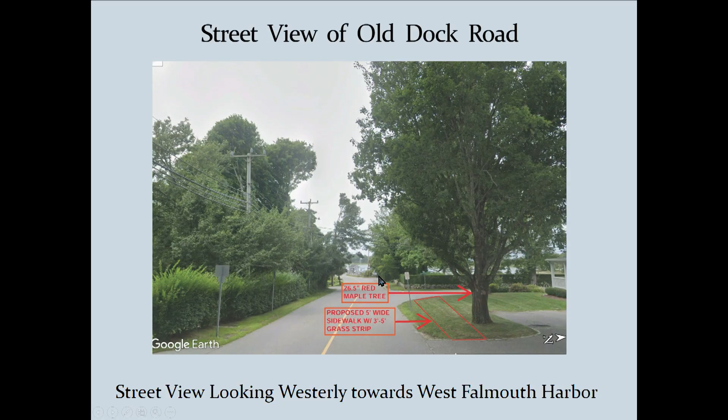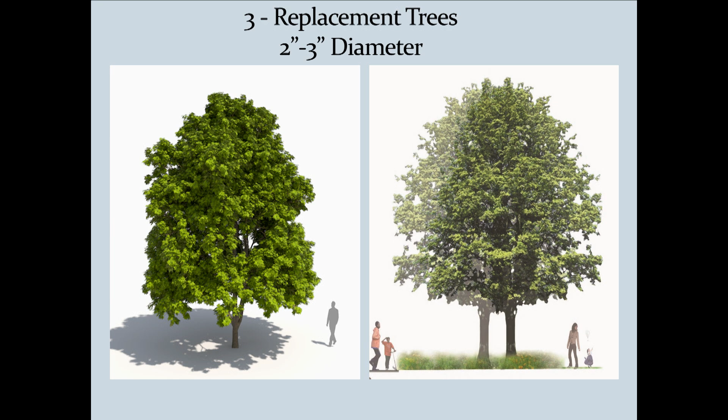So by the removal of that tree, we're looking at putting in 3 replacement trees, 2 to 3 inch diameter. I'll let Jeremiah speak to the species, but in that area we'd be able to put 2 replacement trees, and then we'd be looking at another tree somewhere along Old Dock Road in that area.

And once again, this just goes back to that plan with the project history. The sidewalk was supposed to be installed in 2009, 15 years ago, and it wasn't. It was not installed, so we want to complete it now and have it finished up.

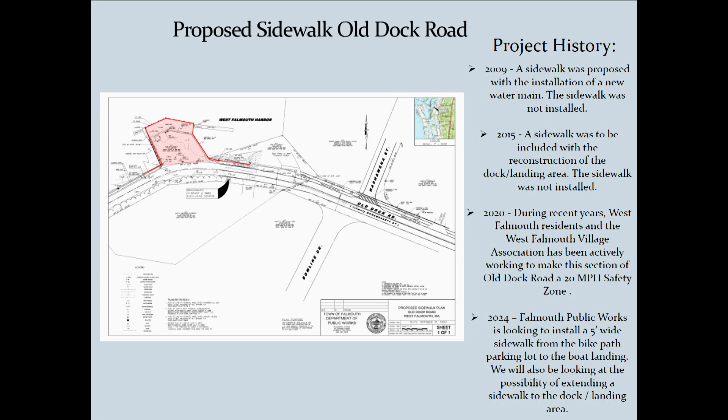Would you like Jeremiah to speak next? Jeremiah, do you want to speak? Well, then we can question them, I just have a question about a property line issue. You have a question? Yeah, but let's let them finish their presentation.

Mr. McConaty, you mentioned twice that the sidewalk was approved but not installed. Your slide shows that you're going to have the possibility of installing it. Isn't it more definitive than that?

No, we're going to install the sidewalk from the bike path parking lot past this first residence up to Nashawena Street, and continue it up to the boat ramp. That's the project. What we're looking at doing is continuing, we'd have to shift the road, but continuing that sidewalk in this area over here to get it over to the ramp. This section right here, this little 75-foot, 100-foot section, is the area that we'd be looking at shifting the road to fit that sidewalk in, to make it a complete project. So it'd be contiguous, from the path over to the boat ramp. Thank you.

So I don't have much to present, but I did set out an opinion that we did for the select board as well. The opinion from myself as the tree warden is that construction of this sidewalk is going right into what we call the critical root zone of that tree. That's where a lot of the storage and anchorage roots are. They're roots over 2 inches, so removing those roots is completely detrimental to the tree's health and structural capabilities. So if this sidewalk goes where it is, the tree will need to come down. There is no real saving the tree if we put the sidewalk there.

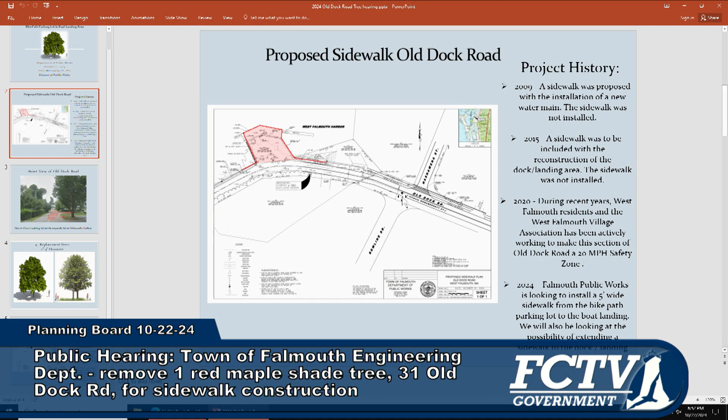The roadway layout for Old Dock Road is 50 feet - it's hard to see, but the property line is about a foot behind that tree. The pavement there is on the driveway, and the driveway's on private property. It's that grass strip between the L shape and the driveway and the tree - the property line's in that area.

So there's gonna be 5 feet of paved sidewalk? It will be five, for ADA regulations it has to be 5-foot wide. Because I'm also thinking of people dragging kayaks down there, giving them enough room. What we've tried to do, where there's room, is put in wider sidewalks - 6 feet and wider when we can. It makes it more like a shared use path, but in this area I think 5 feet would be tight.

Yeah, okay, thanks. Other board comments? Any comments from the public?

Dan Shearer, I live on 4 Old Dock Road. And this is a gorgeous tree, and I would love to save it if it could be. I've talked about it, and I really don't think it can be saved and have the sidewalk, which is very important - as they say, for baby carriages, and me and my 4-wheel little cart going down there.

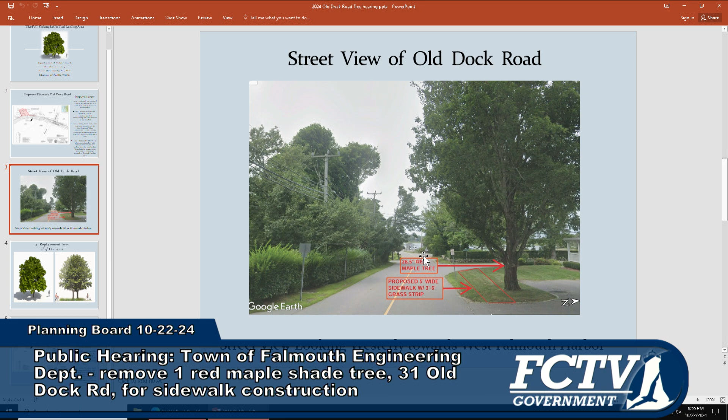I'm saying to Dan right now that for Public Works, this is the third time we've been looking at this. I want to get it done. But I think the process for this is kind of interesting. Mr. Cornock, would you explain the process?

Right, so it's because of the scenic road bylaw that the town adopted some years ago. Old Dock Road is considered a scenic road, and anytime there's work involved in a scenic road layout that requires the removal of shade trees or stone walls, the planning board is required to have a public hearing, take comments from the public, and create a decision or determination, and submit that to the town clerk's office. So it's a process the planning board's involved in only because it's a scenic road.

But isn't there another step beyond the planning board? Are you referring to the select board's process? Yes, and the select board also holds a public hearing, which they already have, and they've issued a positive decision to remove the tree based on a positive decision from this board. So I think everyone's somewhat in agreement at this point, although I can't speak for you at this time. And might be champions for the funding in one year, maybe. Perhaps, yeah.

Mr. Shearer? Let's not put it off. It's been put off three times. Someone who walks there every day, if you dump all these people off where it's now going to go, somebody's going to get hurt.

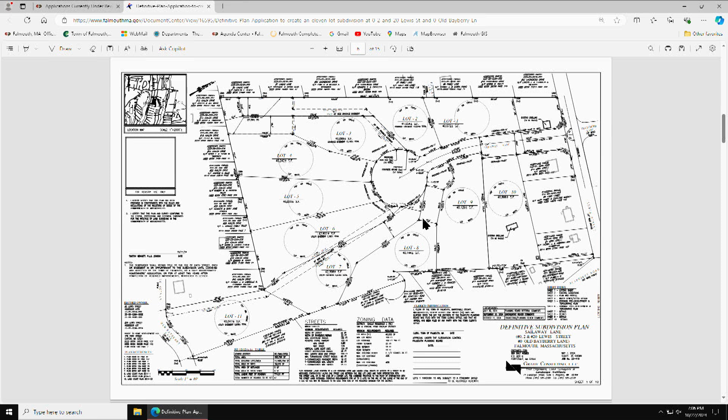I'm trying to remember if you officially closed the hearing at your last meeting. I think we left it open because there were things that were going to come in. That's right, they did come in. So I think our first step would be to close the hearing and then read the motion and see how it goes.

I move to close. Second? All in favor? Aye. Aye. Now the hearing is closed.

One thing we're just remembering is it's important to take any public comments on the new submitted plans that we received tonight, so you may want to see if anyone's here to provide any public comment. If there are none, then you're not in violation of closing that hearing. Is there anyone here who wants to speak on this particular plan? Didn't think so. No, I think they're waiting for their own plans. Very good, so you're good to go.

Okay, the same motion again? Move to close. Oh, we already did, though. Well, he said we had to hold up, I thought. No, you've already closed, it's fine, it's done. So Bob, do you want to read it?

Draft, October 21st, 2024. Motion that the planning board votes to approve the application of House to Home Development LLC, applicant, under Article 4, definitive plans, Chapter 305 subdivision regulations of the town of Falmouth, a definitive subdivision plan entitled Definitive Subdivision Plan, Sailaway Lane.

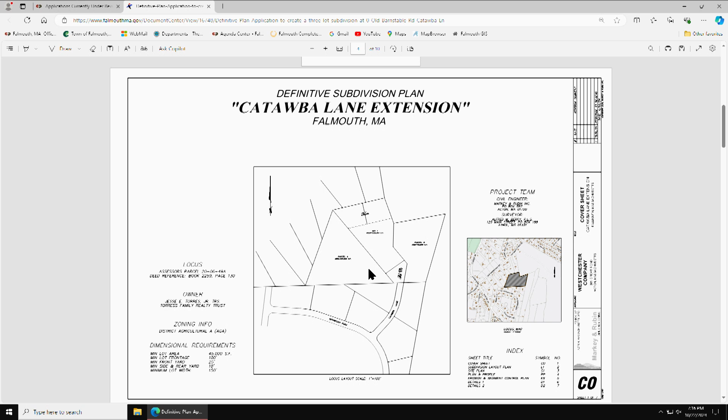Just doing the stub, we put all the language on there with regard to all the other lots not being buildable. There was an issue last time with regard to me not wanting to work with the 300 committee. I'm working with the 300 committee now, I've CC'd everybody, including the neighbors. I think we're in somewhat of a consensus on us being able to use the road, providing I work with the 300 committee, keep everything in conservation.

So there's an agreement that it will go into conservation? It's not that it's going to go to conservation, it just will be unbuildable, and the 300 committee will hold the conservation restriction. We'll still own the property, but they'll basically be the custodians of it, with the exception of the one house lot. And I think that was the big bone of contention last time I was here.

Okay, so I think you may want to validate that before I go further. They already did, they're shaking their heads. Oh, okay, I'm still going to want to talk.

About the roundabout, will that be redone? No, they're just going to leave it out. So did you want to address the other comments that are still in red?

It looks as if all the yellow comments are going to the engineer. The ones that are in red, I think, are really the ones that are going to deal with the stormwater management issues.

And they are addressed, I mean, I know that they said everything that's an issue here, that's in red, is in this report, which we have to go for a stormwater management permit in addition to. Right, so I think that's what we're saying, we don't want to put the cart before the horse, it's kind of redundant, so they're going to do it anyway.

So as far as I'm concerned, I think we've provided everything in the stormwater management report that's in the red. We can go through it if you'd like. I think that the planning department is satisfied by it, and the stormwater people, we'll hear from them at a different point. Did you wish to speak? I'm finished. He is finished.

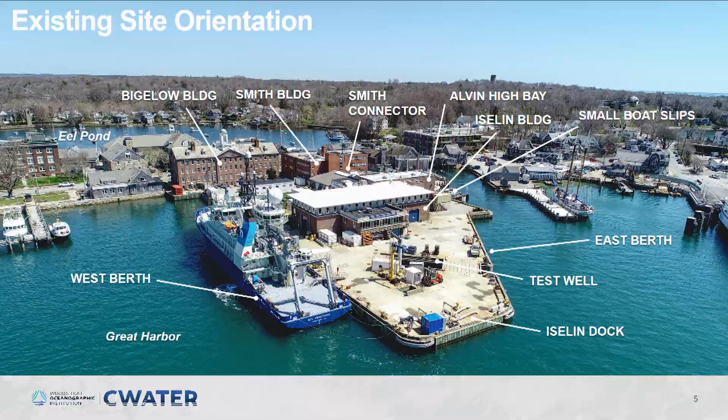So what's the reason we're doing this project? Just as a reminder, it's an old facility, past its engineering life. It's deteriorating, costs us a lot of money to maintain now, and that number is increasing. We also have operational limitations. It was built in the late 60s, and its height is inappropriate for the future relative to sea level rise and other climate impacts, so we have that threat existing. It's suboptimal to how we operate now, and certainly for what we think the future of oceanography will be. So there's an opportunity when we redevelop the waterfront to have a future-looking facility.

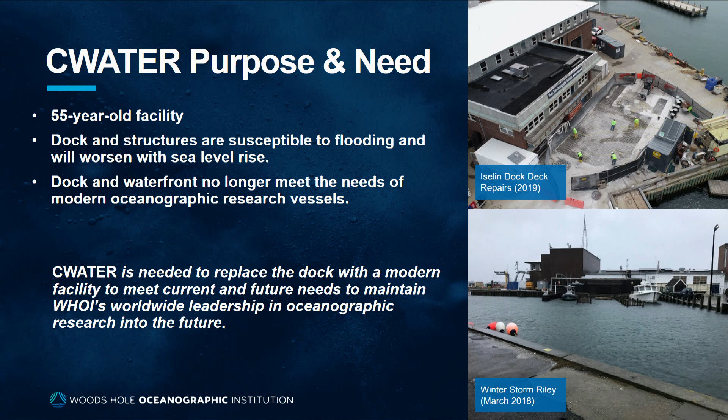So why are we making this change? The fundamental difference between what we proposed before and what we're proposing now is the order of the project. Originally we were going to do a building first, then build a new dock—taking down buildings, putting in a new building, and then building the dock. Now we're going to do that in reverse. The reason is that the urgent requirement is the dock. The dock is deteriorating and costing us more each year to operate, so we've prioritized the dock. This is a large enough project that we have to consider doing it in phases, fundamentally because of the cost. So we see this as being phased, allowing us to find the money to do the project in the right order of what's most urgent.

It also allows us to take a more holistic approach to this particular site. Previously we weren't even thinking about Smith, and now we are. But this is a longer-term horizon, so we're going to tell you the story of our plan, which has several years to it—hence the phasing, and the idea that we're telling you the end game, but there'll be several steps to get there.

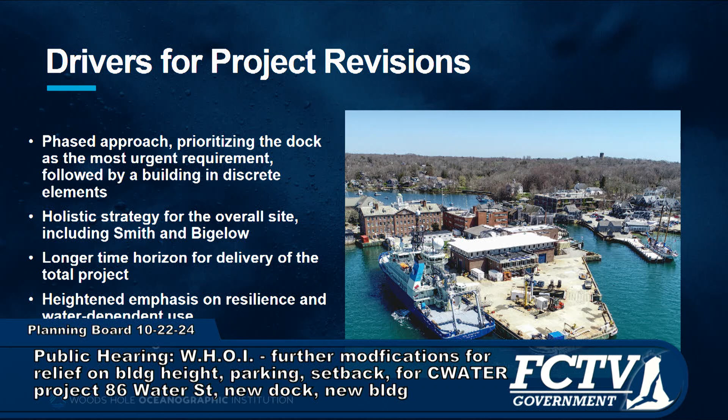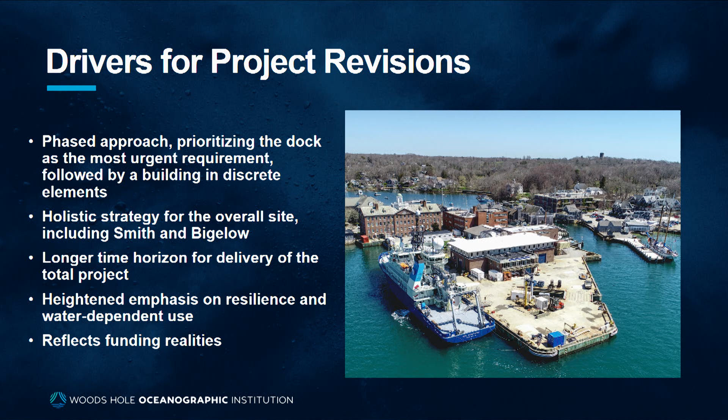By taking this holistic site approach, it allows us to focus more on the resilience question and the ability to withstand sea level rise, considering the entire site in that process. That's an important outcome. And really it comes down to funding realities—overall this project will be a significant amount of money, so we have to do it in the essential order, starting with where we think we can get the money for the most essential thing, which is the dock.

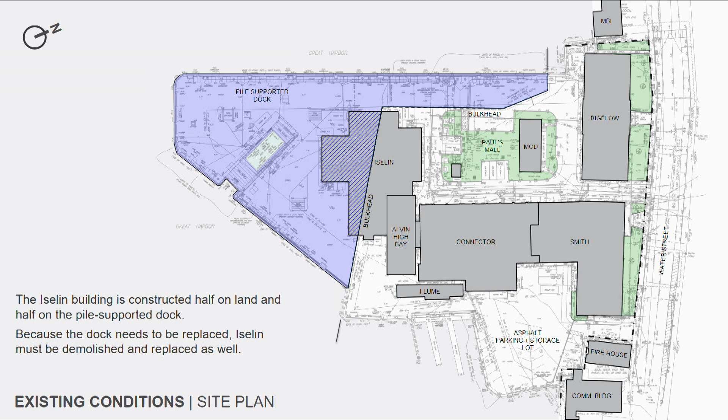So once you have a dock project, you also have a building project as well to replace that. The site itself has a number of regulatory constraints associated with it.

In red is the FEMA VE zone. As Rob mentioned, the town's wetland bylaw has a presumptive 25-foot setback to the VE zone, shown here in orange. A number of the existing structures on site exist in that presumptive zone, and some of them actually

exist in the VE zone itself. The center portion of the site is an AE 12 zone, meaning the base flood elevation is 12. That'll be important momentarily when we talk about the section of the building.

In addition, along Water Street there's a 25-foot setback from the property line, shown in purple on the right-hand side. So the building that Rob just mentioned, the Smith building, currently exists in that front yard setback—it's existing in violation of that.

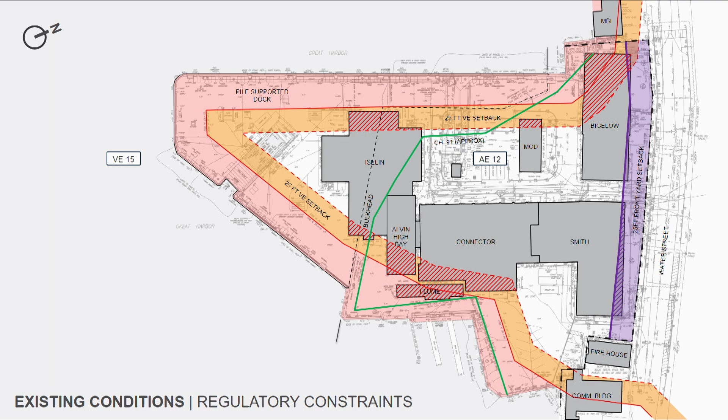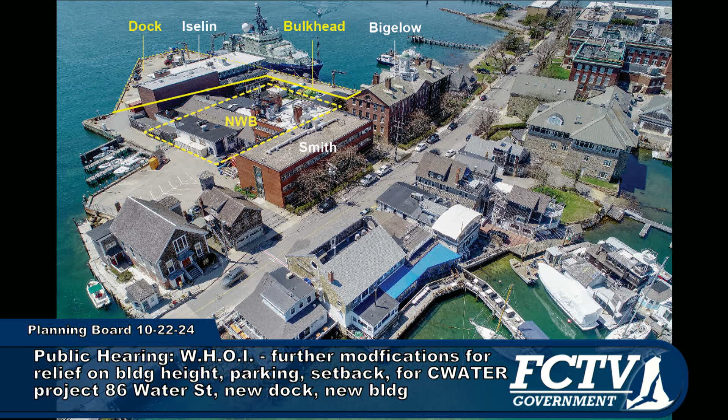So initially, when the phasing was building first, the thought was that there would be a demolition of the Smith connector, a low old building that was actually a garage many years ago, located behind Smith.

Demolition of that structure would create the new footprint for the building. That would allow work to keep happening in the Iselin building, build the new building, move the folks out of Iselin into that new building, demolish that, and then do the dock. Fairly complicated, but very briefly: do the building first, do the dock second.

So a lot of the planning principles were associated with that phasing approach. Because we were doing the building first, we were really constrained with a footprint that we could work with. We had setbacks off the existing bulkhead, and setbacks off the existing Iselin building, which you see to the left in the yellow dashed line. So the footprint of our building was fairly constrained in the previous submission.

Because it was constrained, we were forced to go up—the building had 3 floors. In addition, the first floor had to be raised above the base flood elevation, and as such, when we were previously here, there was a request to exceed the maximum zoning height in order to get 3 floors in.

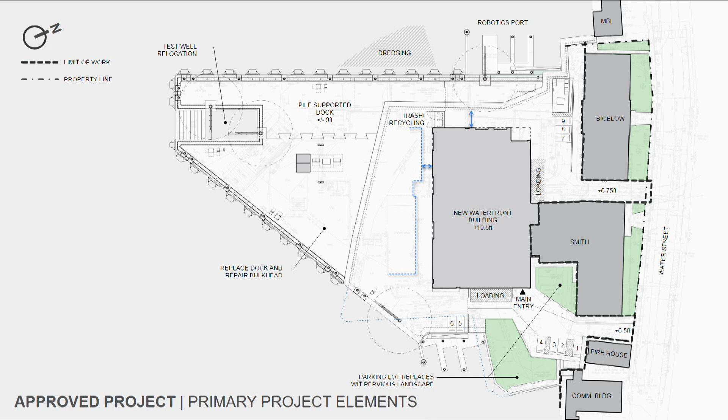Without these constraints, you'll see in a minute we're able to do something that's a little more spread out and achieve the same amount of building program on 2 floors, and no longer have to go for the height variance, permit, special permit.

In addition, because of the constrained footprint of the previous design, there was a portion of the building that extended into the presumptive 25-foot setback, indicated in the orange hatch. So this was something we were forced into because of the constraints of the project.

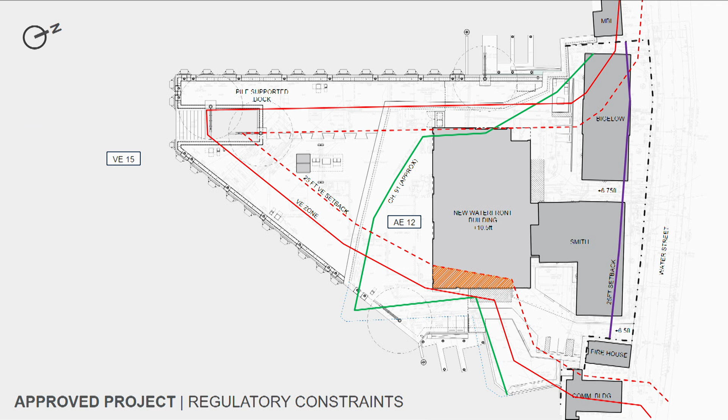And again, as I'll show you in the proposed plan, because we have more room to maneuver—since Smith is being considered for demolition as part of the second phase—we no longer need to extend the footprint into that 25-foot presumptive setback.

A big part of the story, as Rob mentioned, with the design and planning of the new waterfront building and the dock as well, was looking at resiliency and sea level rise.

So what you're seeing here is a section in the lower right-hand corner. It's hard to see, but there's a red line cut through the aerial photograph there—it's a section essentially cut through Water Street, with Great Harbor on the left and Eel Pond on the right. You can see the existing spot elevations.

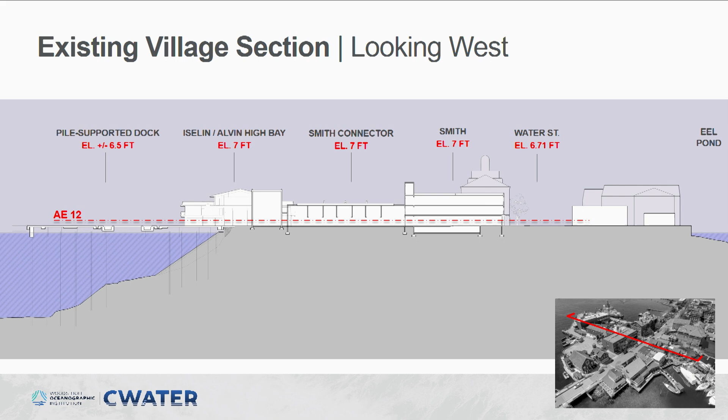Water Street is at just under elevation 7. The Smith building that exists today has its first floor at elevation 7, same with the connector and the high bay building. The pile-supported dock is anywhere between elevation 6.5 and 7. So those are the existing elevations.

As you can see, it's the cut looking closer through the site here. The proposal is that the existing dock is at elevation 6.5, and the proposed dock that's going to be constructed will be at elevation 9.

So this is a pile-supported dock that will be constructed day 1 at elevation 9, with the ability that in the future the dock itself could support being built over to raise it to elevation 10.5 to 11. In that way, the dock can be modified in the future to deal with sea level rise.

There's been a lot of discussion about different ways to do this, and ultimately the idea is an overbuild—the dock will be designed structurally to receive another extension on top of it in the future.

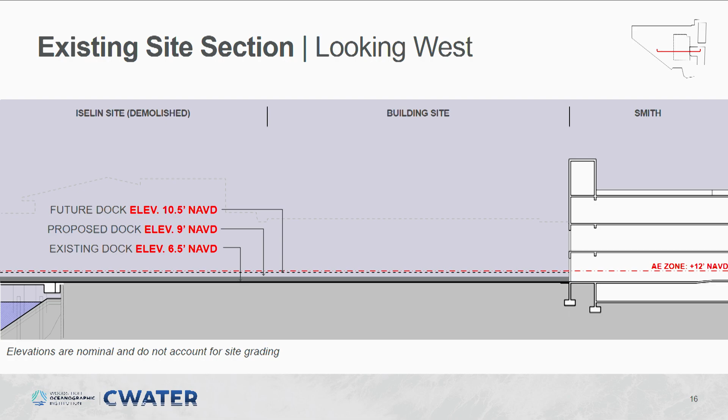If that makes sense. Oh, I'm sorry—okay, please interrupt me if you have any questions.

We both had the same kind of question: how do you raise it another 1.5 feet when the necessity happens?

That isn't exactly my question. Oh, I thought it was. No, sorry.

Different question. I'm David Jones, I'm with WSP, the engineers.

Along the perimeter, we're going to be putting what's called a utility corridor, housing a lot of the water and electrical systems. That's going to be built about 1.5 feet higher than the first deck. So we'll have a perimeter around the side that we'll be able to build up against. In the areas where we don't have that perimeter, we're leaving a concrete cap that we'll be able to attach into to build that perimeter. So we'll have a perimeter on the edge, and then we'll build into that.

I'd actually have a different question, and then a second one. Is all that expense for 3 feet? I wonder why you're not adding more feet while you're at it.

Yeah, I can answer that. The reason is because 2.5 feet is as far as we think we can go and still have a workable dock for the next 20 to 30 years. In other words, it's inconvenient to go up 4 feet now. It doesn't support our operations. We think we can do 2.5.

The idea of the additional 1.5 feet is that as we experience sea level rise, whether it's 30 years or 60 years from now, we have the option of raising the deck level another 1.5 feet, as we experience the rate of change.

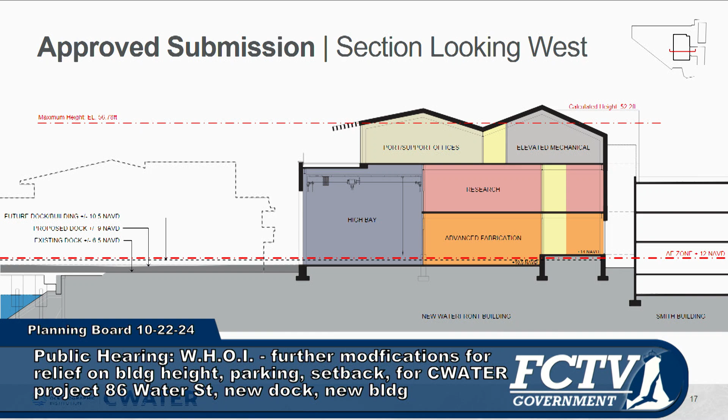Any other questions on the previous design? Okay, I'll pass it off to Valerie, who'll talk about the status of permitting. I'll remind the board, Valerie Moore from Nutter, McClennen and Fish, here on behalf of the applicant.

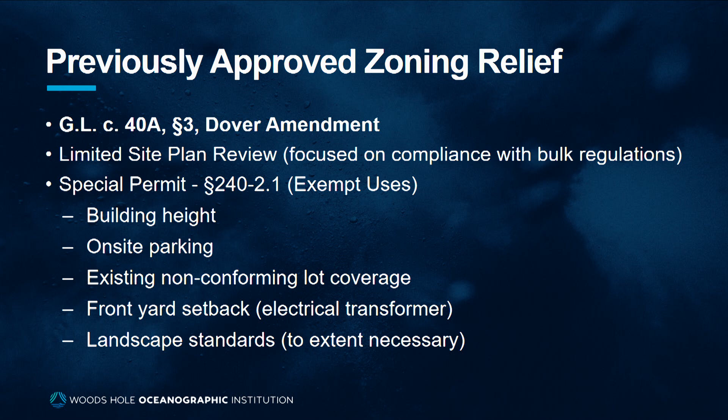This is a Dover Amendment protected use as an educational institution. When they were before you previously, it was for both limited site plan review focused on compliance with the bulk regulations in the zoning bylaw as allowed by the Dover Amendment, and a special permit for relief on a few criteria: first building height, second on-site parking, third the existing non-conforming lot coverage. The front yard setback was the fourth, because the electrical transformer proposed was going to be constructed within that setback, and landscape standards to the extent necessary, as they're not strictly within the realm of the Dover Amendment.

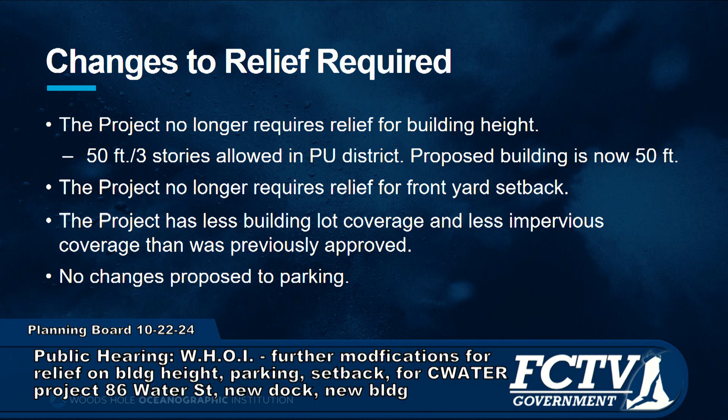Jeff will go through the changes to the project substantively, but it's pretty rare that a project comes in front of you needing less relief, which is exciting. There's no longer a need for relief from building height because the new building is compliant with the zoning bylaw. The transformer has been removed from the front yard setback and moved elsewhere, so now the project complies. The existing Smith building's nonconformity as to the front yard setback would also be corrected by the new building. Additionally, the project has less building lot coverage and less impervious coverage than what was previously approved, so while relief is still required, it's less than what was previously approved by the board.

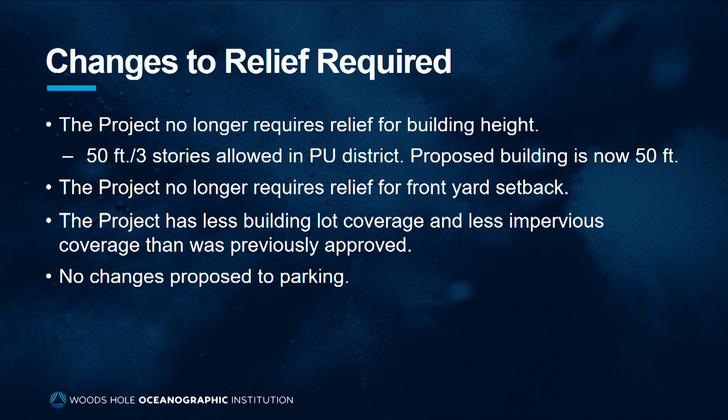We are not going to get into parking tonight because we haven't made any changes to what you previously approved. The changes don't alter the number of employees and people using the facility, so we have not made any modifications to the parking. With that, I'll turn it back to Jeff to go through the design changes.

The way I'll do this is present the full vision of the project first, since that's what the request is today in terms of necessary approvals. Then I'll talk about the phasing of the project, so it's clear what the ultimate vision is, and then the implementation on a phased approach.

The proposal today would be to construct the dock first, then construct the building in 2 phases. Ultimately, the footprint of phase 1 plus phase 2 would be the yellow outline you see on the screen, extending in front of the Smith building. The Bigelow buildings, the historic WHOI building, are in the background of the image. The Smith building is a military-style building built in the 50s.

Since the previous presentation, a structural analysis was done on the Smith building and found that it too is nearing the end of its service life and has significant structural deficiencies. Also, because its first floor is at elevation 7, it's not protected from sea level rise or storms.

Whereas the Bigelow building, interestingly, if you walk down Water Street, is kind of like a split-level ranch - the first floor goes up to elevation 15, or down into a lower level area. That building could be more easily adapted for sea level rise because there's infrastructure on the lower floor that can be brought up to a higher elevation. You could essentially abandon the lower floor in some future state and still have it work. The Smith building is not as easily modifiable. So it's both the iconic building for WHOI and more easily adaptable for future sea level rise - those are the two reasons everyone thought it's a building to invest in for the future. Smith is more difficult.

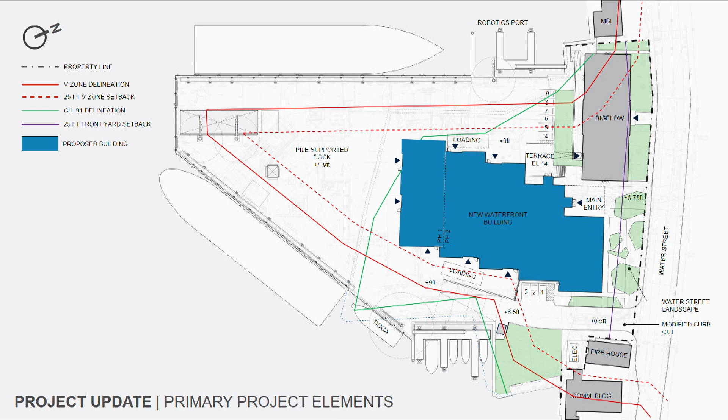The new building ground floor will have to be at elevation 14. That's your base flood elevation of 12. The state building code says you have to be 1 foot above that base flood elevation. And then your local wetlands bylaw says you need to add another anticipated 100 years of sea level rise, which is another foot on top of that.

So the ground floor, essentially the first floor of the building, of spaces that aren't functionally dependent—so not the garages for the submarines and AUVs—has to be at elevation 14. Luckily, the upper floor of Bigelow is at elevation 15. So once we set our floor up, we're at the same level as the primary level of Bigelow, and we can use our building and elevators to get people in and over to Bigelow. That's what you're seeing in that terrace. It isn't physically connected to Bigelow—it's important the two buildings are separated—but there is a pathway up into that building.

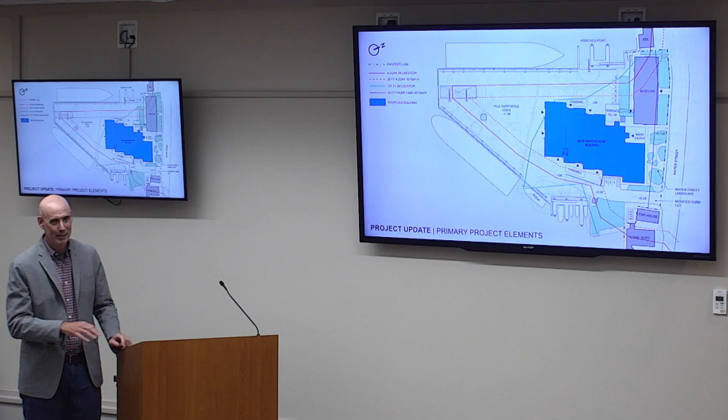Charlotte: I'm not seeing the Alvin High Bay. Where is that going to be? The Alvin High Bay will be the first rectangle you see here built. There's a dashed line showing Phase 1 and Phase 2—the Alvin High Bay is in Phase 1, the first thing that gets built, since it's the most important thing for the functionality of the facility. I have a floor plan in a minute that can show that, but essentially it's that first rectangle.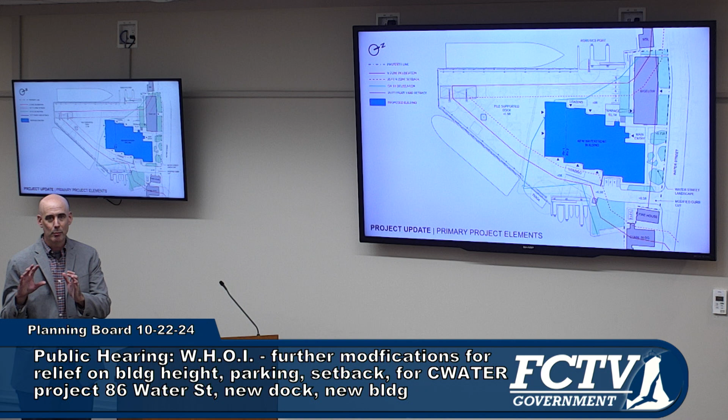I was down at the site today—it's pretty busy. Part of that building is still on piles, is that correct? No—the limit of piles is where my cursor is right now. So this whole building is shifted back off the pile-supported dock, so we're not building on piles at all. It's entirely founded on earth, to not make that same mistake again. By building less, we're able to pull back away from being on top of the pile-supported dock, which provides more lay-down area on the dock, because today it's a bit of a safety concern—there's too much happening in too small an area.

You mentioned something about ADA access—can you show me that path? Folks would come into the main entry of the building—there's an elevator in the plan package, right about here. You'll come out onto... are those stairs up, not down? They are stairs up. Got it, that's what I couldn't figure out. And then across. All set.

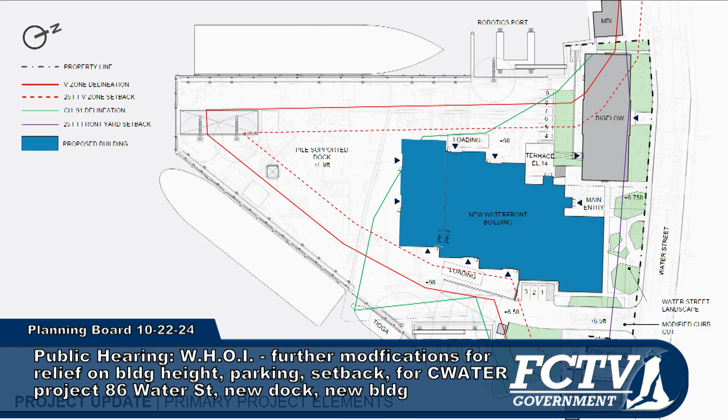So there is going to be one way in and out of this site? At the end of the day, one way for vehicular traffic in and out. What about turnarounds—is there going to be enough room to turn a large vehicle around? Yes, a full analysis of truck turnarounds was done with the largest lowboy carriers—they can get onto the site and turn around. In addition, the fire department requested a turning study be done with their largest piece of equipment on and off the site.

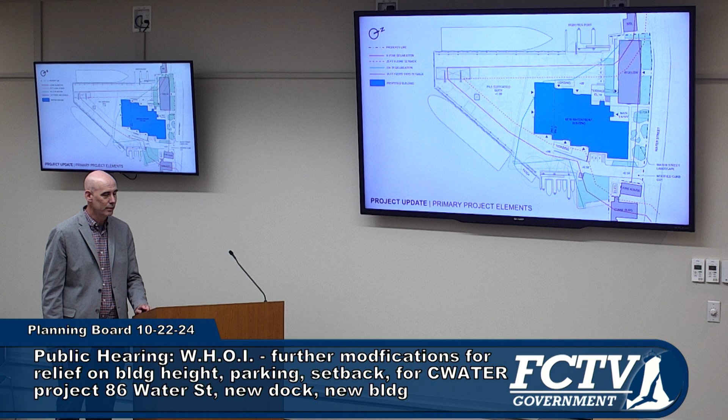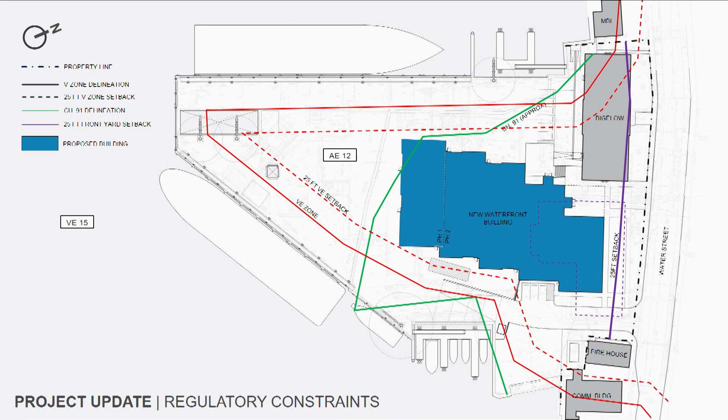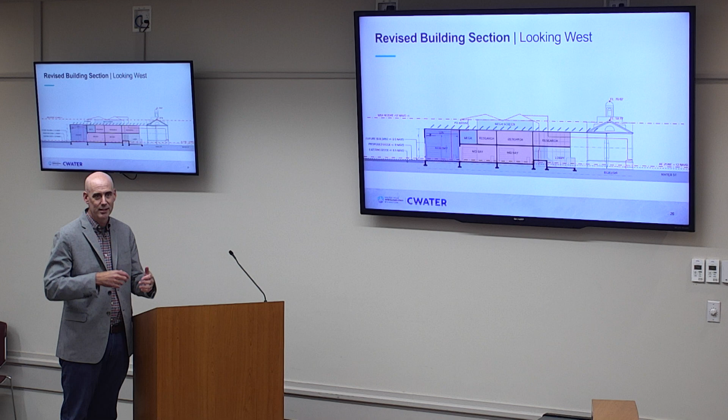This image shows more of the regulatory boundaries and how the building footprint sits within that. Here's a section through the new building itself. In the background, on the right-hand side, is Water Street, and then the Bigelow building with its cupola at elevation 79. The new waterfront building's lobby will be down at street level, with the ability to be modified if the Water Street area and roadway get raised in the future. Then there's a series of mid-bay, and—regarding the earlier question of where the high bay was—the mid-bay and high bay program face outward to the dock itself. Those program areas are functionally dependent, because it's all dock program: the submarines and AUVs get worked on in the shops, go out to the dock, and come back. Those elements are housed in the high bay, which is at dock level.

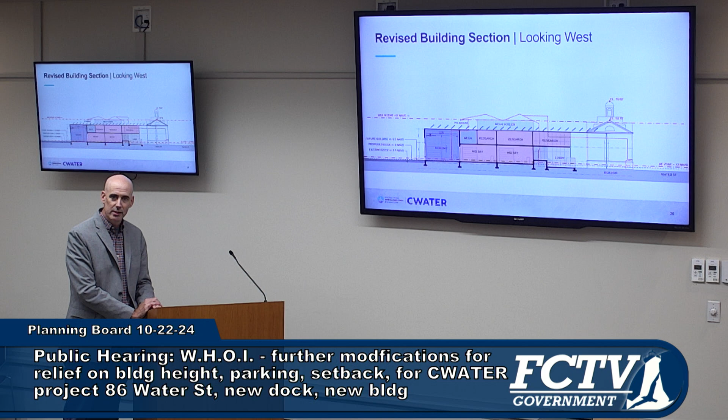Similar to the dock, and this was in the previous design as well, the mid-bay and high-bay spaces have the ability to be retrofitted in a renovation in the future up to elevation 10.5 or 11. All the infrastructure inside the building will be built so the interior spaces can be raised up, including the clearances for cranes in the high bay.

So you're really creating a plaza off of Water Street? Yes, there. I have some images, hopefully. That's an exciting thing for the streetscape.

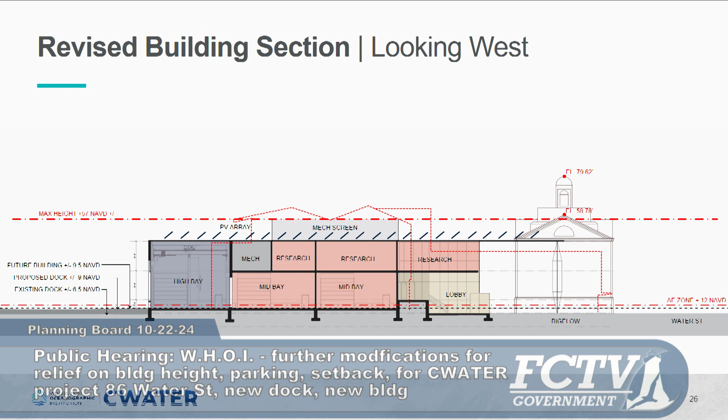Again, the maximum height will be elevation 57. The grade is at 7, so that's your 50 feet, which is in compliance. In red, you can see the previous building, which was three floors instead of two at this point.

In terms of the functionally dependent spaces, what you see on the right is this interesting cut through the ground level of the building. You can see the entrance to the building at elevation 7 on Water Street, on the lower right-hand side of the diagram.

Non-functionally dependent uses such as support offices and spaces will be at elevation 14. The remainder of the building will be at about elevation 9.5 today, surrounded by a waterproof knee wall at the perimeter. This is a requirement for dry flood proofing for being in the AE zone, a building code requirement related to FEMA and the flood insurance program.

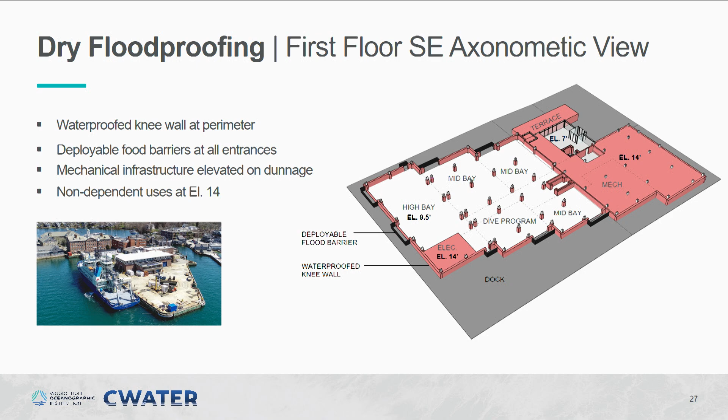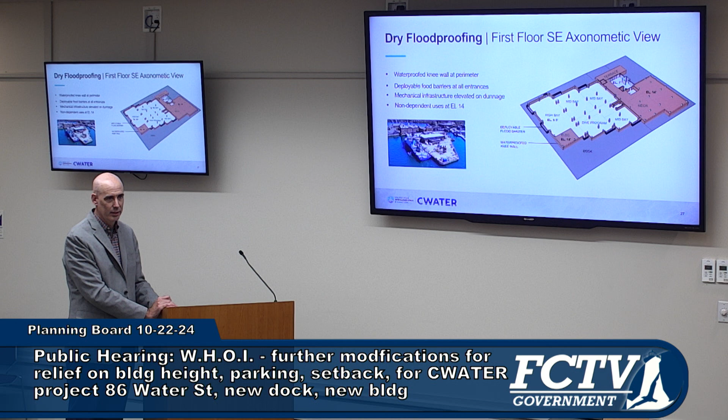The waterproof knee wall creates a bathtub for the building, along with deployable flood barriers, which as part of the Resilient Woods Hole effort have had some demonstrations. These get installed in front of doors to prevent water from entering the building, so deployable flood barriers would be at all the entrances. All the infrastructure for the building will be elevated on dunnage or upper areas, and all non-water dependent uses will be at elevation 14 to comply with building code and the wetlands bylaw.

Okay, so getting to probably what you're all most interested in - this is a sketch showing Water Street today. On the right-hand side you see the Bigelow building, the corner of it, and the entrance into the dock between Bigelow and Smith. Smith is in the center of the screen, and the community building, the old firehouse, is on the left.

What is shown graphically is the AE12 flood zone, which puts a level of realism into the fact that it's halfway up Smith's first floor. But if you look at the water course of the Bigelow building - the first floor and the lower level - it's a couple feet above that, which is what I was describing earlier.

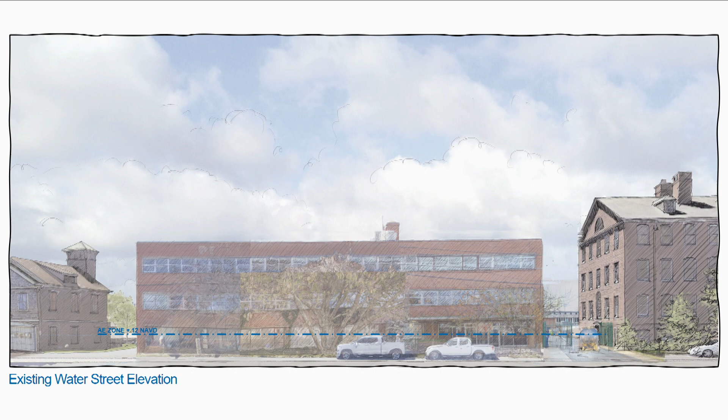So what is being proposed is this: on the left-hand side you see the stark difference between the building that's right on Water Street today, violating the front yard setback with a very limited aperture out towards Great Harbor, versus the proposal to open that up as a primary entrance on and off the site.

And the new waterfront kind of park along Water Street, because the building is set back now from that. Really the vision here along Water Street is a place to stop, rest, with planted trees. It's also a didactic area where WHOI can put out interesting information about their mission, different objects and things that exist around the village right now, to give a starting point.

The building itself - the thought is that the base very much mimics the height of Bigelow, so there would be materiality-wise, perhaps a red brick. Then the middle portion of the building, the cadence of the windows, is very similar to Bigelow as well. And then the idea of the roof plane, which supports the PV array.

Since we were last here, the state approved a new energy code in which reliance on renewables as part of projects is significant. The idea is that there's a quiet datum at the top of the building, and as you notice, it mirrors the height of the Bigelow cornice line as well.

So the intent here is really to try to, in terms of the scale of the building, in terms of the materiality, and in terms of the height, link itself to the Bigelow building. On the right-hand side you see that entrance - you would enter in there, go up to elevation 14, and then can link back into the Bigelow building.

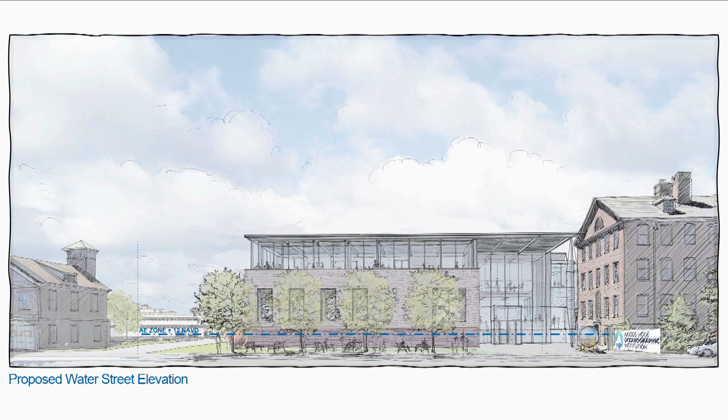The firehouse and community buildings use cedar shake, which is ubiquitous down here, but it's difficult to maintain in this climate for an institutional client. Still, the coloration, spacing, and size of slate shingles is a similar scale to cedar siding. I've seen buildings like that in Northern Europe - I'll share an image so you can see. The idea is that the central band of the building could be that.

This kind of slate rain screen is performative as well. This costs a fortune - it's not a cheap project. So it's slate siding, just that middle band. It'll last forever though, just like a slate roof.

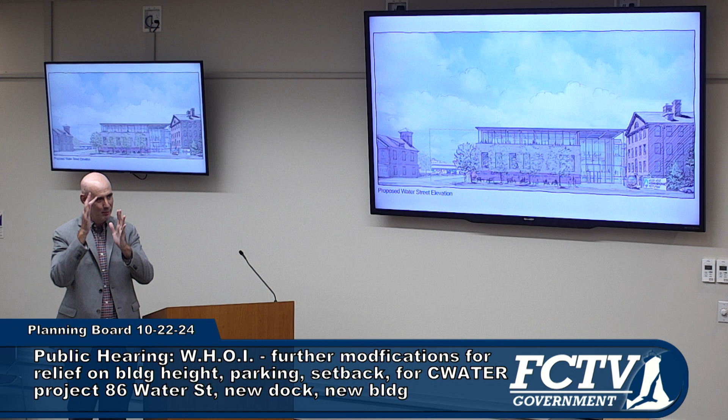But it's done in a different way. When I say rain screen, it means it's individually put up on a facade that's held off the thermal layer of the building, and by doing so it's a very durable, long-lasting approach. As mentioned, the intent here is not to have a building that needs constant investment - it needs to be absolutely durable over time. And then the top portion of the building would be more glazed.

That's where a large portion of glass would be - really, as tall as people are, we would never really see it in that elevation because we're just not tall enough. When you see it drawn that way, it reminds me of Mrs. Jack Gardner's Palace - is that Renzo Piano's building in Boston? Yeah, the glass box, very interesting.

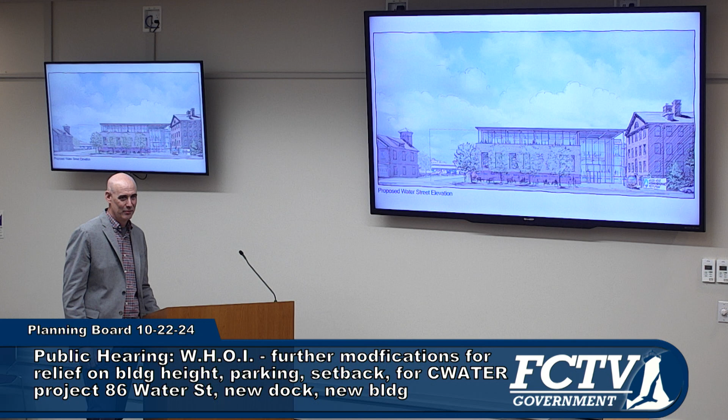Paul has a question. It's interesting you just used the term iceberg. If I remember correctly, the Smith Building is named after Iceberg Smith, who did his research up in the Arctic after the Titanic went down, and he was awarded a PhD from Harvard because of research that changed all of that. So hopefully keep the name. I did not know that connection - that's great.

I have a question too - we thought this was... go ahead. I'm questioning the durability of all the glass there, considering we're having more intense storms and are overdue for a hurricane up here. The building code in this area is extremely stringent in terms of how glass can be used.

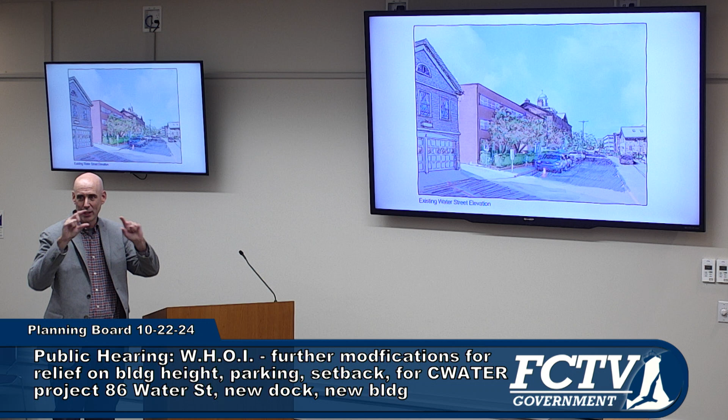The glass itself will need to be rated for hurricane resistance and include an inner layer, like in your cars, so when it breaks it doesn't just shatter. When they test the glass, they actually fire projectiles at it to ensure durability. All the glazing on the project will need to meet that standard. But really it's mainly the third floor of the building that has views out and would have glass - the base of the building we're thinking is much more solid and heavy, harkening back to Bigelow, the MBL building, and the Candle House, using a material that feels more permanent versus the top of the building itself.

Walking down the street, you'll be able to see more of the sides of the building from both ends. Let me toggle this. So this is how it exists today.

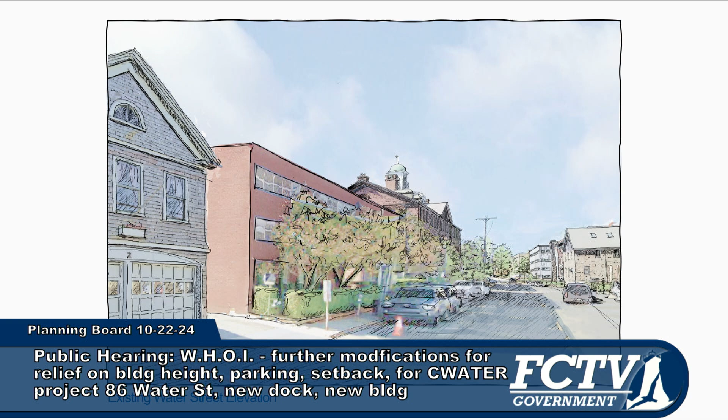The Smith Building is right on Water Street, if you walk down there, it's not necessarily pleasant because you're on the north-facing side, it's in shadow a lot. But really, this idea of pushing the building back off the street and creating a space, we were enamored with the idea that now Bigelow has a face that's facing back.

Think about all the people walking from the ferry terminal, finding their way down here while waiting to go out. They now have something drawing them to that face, and the structural element at the corner kind of brings you into the building. And again, just kind of a lively front yard with trees.

That lower base, because we're set up 7 feet above the ground, we can't have any windows. It's not a very friendly ground floor level because of the raising off the ground. But as you can see in this artist rendering, the idea is maybe we can put displays and other things embedded in that wall, so when people come and want to learn about it, they can walk up and engage the wall to give it some life.

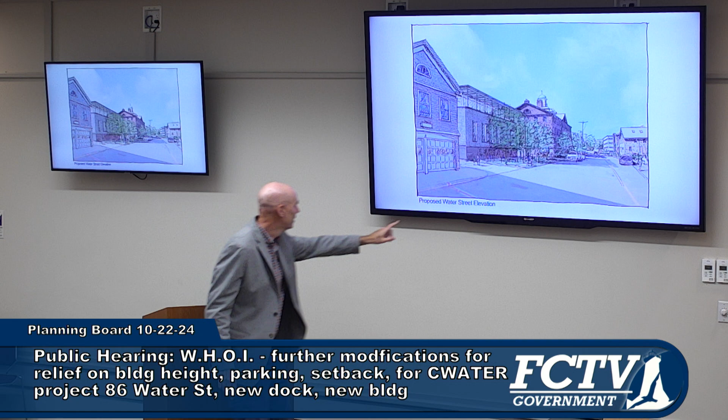So you can see that along here as well. Jim? Question, what's the use on the upper floor?

The upper floors are workshops. So essentially, all those AUVs, things that are bigger than Alvin, will get craned up onto the second floor. You'll see on your floor plans it's essentially a bunch of lab workshop space, electronic workshops up there.

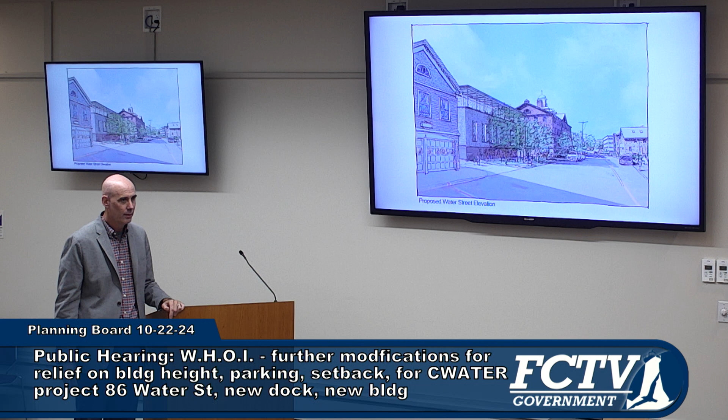With all glass walls, and how high are the ceilings? 12 feet. Actually, the glass doesn't go floor to ceiling either, it's a bit of a trick happening here. The glass starts at waist level. You probably see that in your section as well.

There's a small terrace. The one bar facing onto Water Street houses some of the offices and labs, so that's an amenity for the building, and there's some teaching and meeting spaces that potentially could be used with the community as well. So really, we were enamored by this.

We're also interested in the idea that in front of the Candle House and MBL there's a little pocket park there. We're thinking this is like an opposite, a mirroring happening across the street, another episode that you'd see as you're walking down the street. There's this, and then there's that space as well, so it was kind of an interesting dialogue between the two.

Well, it'll be a big improvement on Water Street when it happens. When do you go before the Woods Hole Community Association?

We've presented this basic concept. We have a community advisory group, which includes representatives of the Woods Hole Community Association, the Woods Hole Business Association, and our neighbors. So they've seen versions of this already.

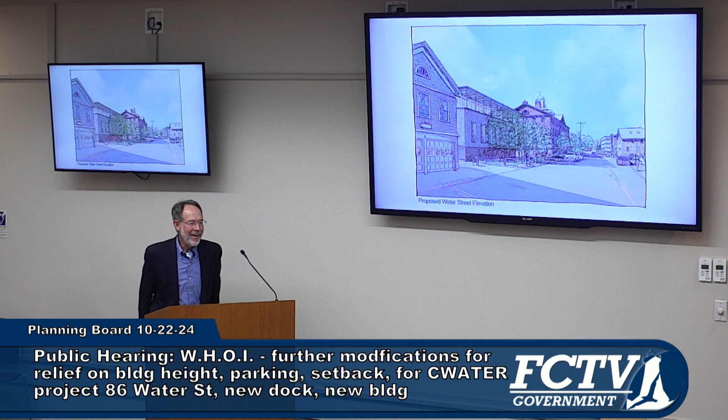How's the reception been? They're not here, but it's been good, it's looked good, it's been nice. I'm pleasantly surprised actually, because some of the buildings down there that have been built by the institutes aren't that nice looking, but this is a nice looking building.

All right, so those were the fun images showing kind of the ultimate vision of the project. Just want to talk about how it's seen as being phased.

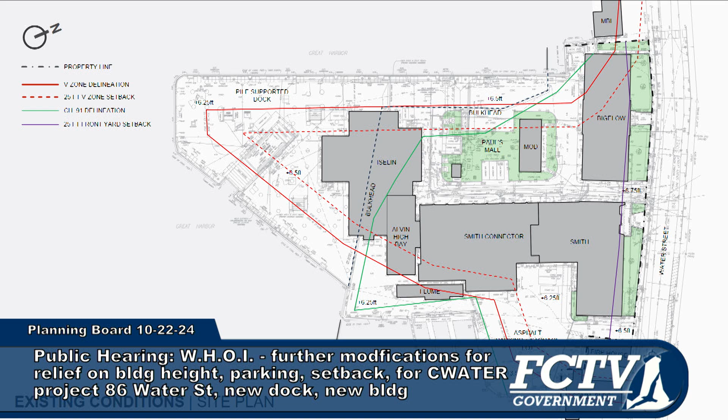It's important to note that in your packages you'll have two separate packages: one shows the site plan at phase one, and one is the ultimate site plan that I presented just now for the ultimate build-out. So in terms of phase one existing conditions, the Iselin building, the Alvin High Bay, the flume, and a portion of that Smith connector get demolished.

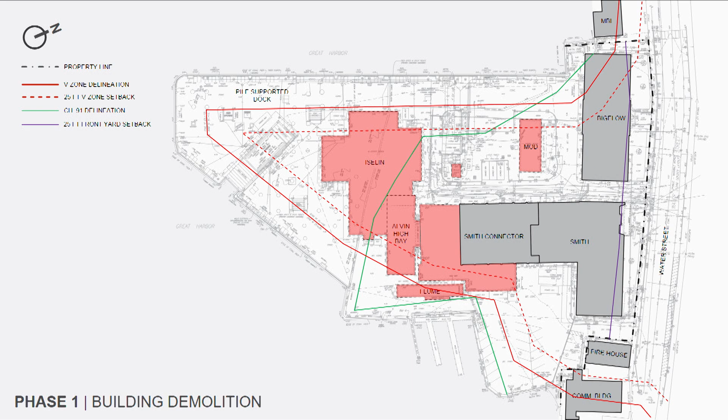The dock is constructed, and then the building will be constructed. As you can see, it's just that first rectangle of the high bay. So that first thing being built is essentially the high bay, the most important thing for Alvin, for the overhauls, everything else. The high bay also has some of the critical dock infrastructure supporting it as well.

Also, as part of phase one, you get the planted area behind the community building and the firehouse, and that's to offset the loss of pervious area.

So we're always, in every phase, trying to balance out the impervious and pervious areas. We're not ever adding more impervious area than existed. We'll provide all 9 parking spaces and 2 loading areas as well.

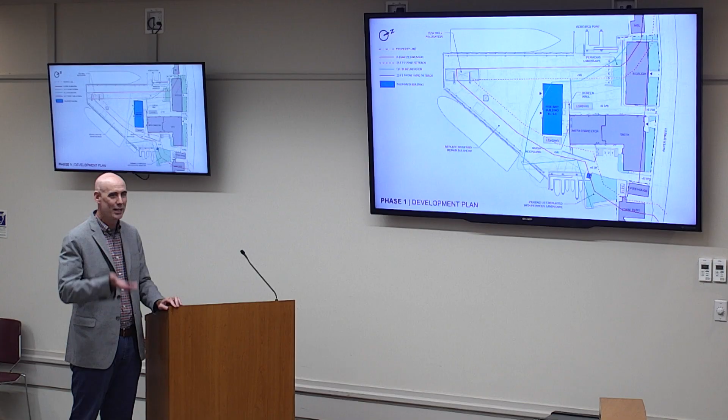Another really important thing—the question was, why not just raise it all at once? We need to get between elevation 6.5 and 9, and we need to be able to essentially ramp up between Water Street and the new 9-foot dock. There's not a lot of area to do that on the site, and we can't have too steep of a ramp. I don't know if you've seen any of the large semis that go down—they're called low boys because they sit very low to the ground.

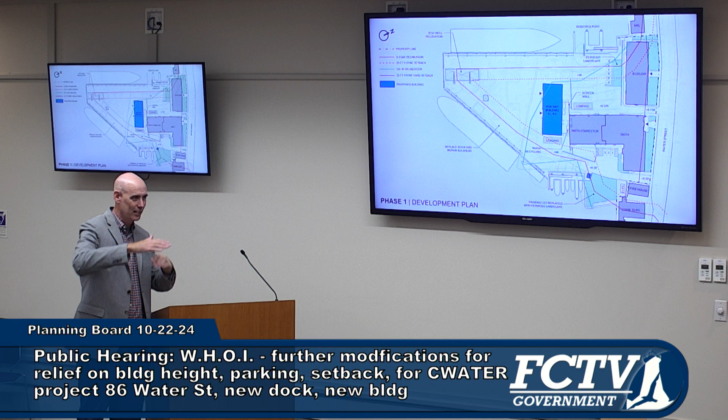And if you start heading up, they're going to get stuck. So until some future state in which Water Street, 30 or 40 years from now, also gets raised up, you can't mitigate 4 feet of elevation change. We can mitigate 3.5, or 2.5, 6.5 to 9 feet, but we cannot mitigate the entirety of it.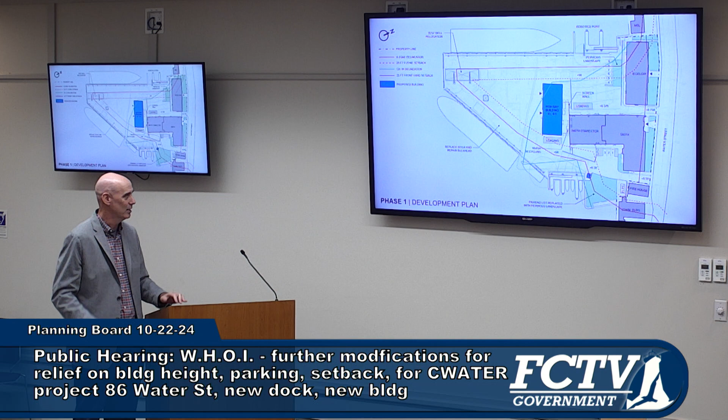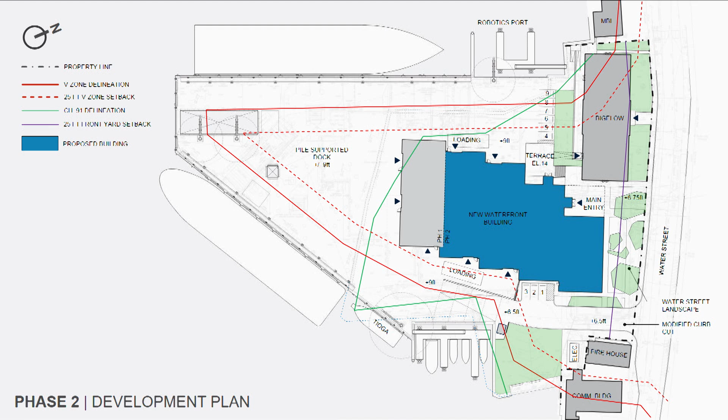So that's another important note on why it can't all be done at once. This would be the phase 2 plan, and this is what it would look like in the future. So essentially, that element that's at the end—in phase 2, the Smith connector and the Smith building would be demolished, and the remainder of those elements would be constructed. I have a timing question for Jed.

Permits last 3 years. If you try to permit the whole thing now, depending on funding success, the permits could expire.

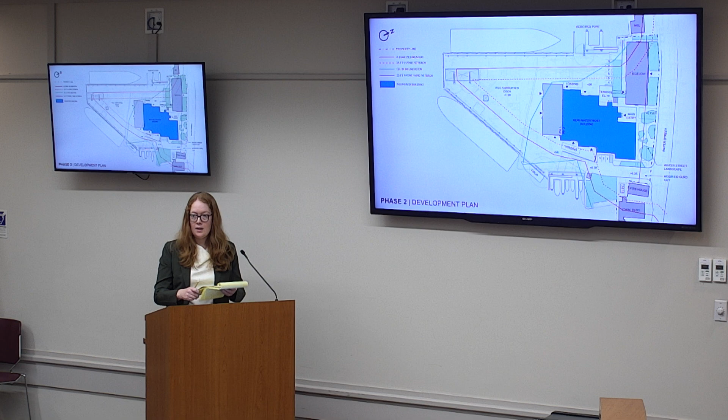We're going to ask that in your decision, you approve some language that says the permits are vested at the time that we undertake the dock work. So by implementing that first phase, the permit is vested and it no longer expires, and then it will endure to allow the project to take place as needed. Can we do that? Yes, you can. If we want to, okay.

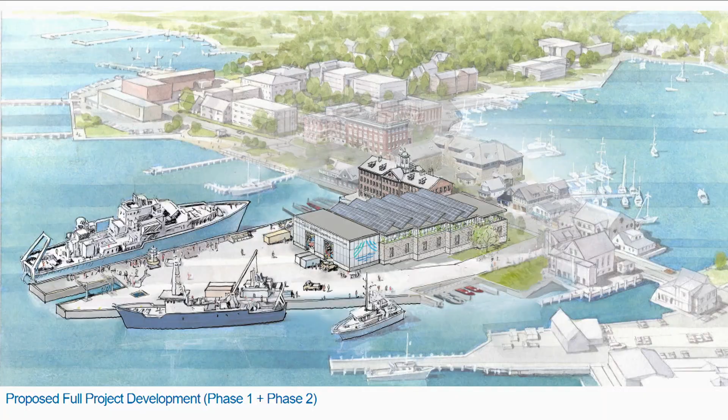And then the final kind of image of the building in the site as well. I'll leave you on something that's very dense and not as nice as the pictures, but essentially this is a chart indicating all the building block coverage, FAR, et cetera.

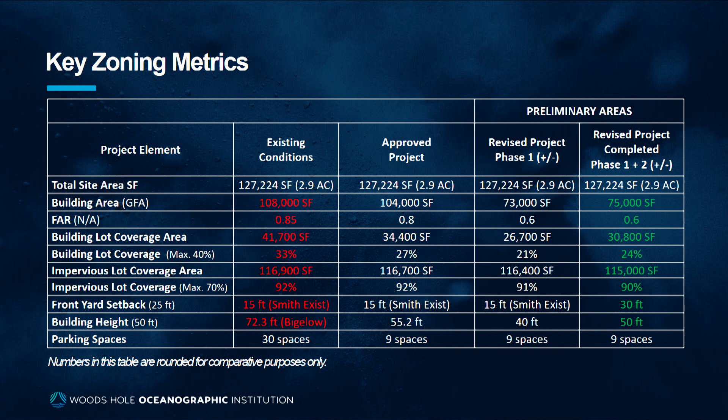The existing conditions with portions of the site that are non-conforming today, the previously approved project, and then phase 1 and phase 2, meaning the ultimately completed project. What's interesting here, as Rob mentioned, is that the GFA on the site today is about 108,000 square feet. All said and done, we're at 75,000 square feet GFA at the end of the project. And similarly, building lot coverage area goes down as well.

So all in all, as Rob mentioned at the beginning, he asked us, as we were programming the building and looking at what needed to be here, to be very critical that only uses that are dock critical—like day-to-day activity down there, needing to use the water—go into this project. That's important fiscally too, that you're only spending and only building what you absolutely need for the future.

So, that makes a lot of sense. But I do have another question, because originally you were planning to have more personnel there. Where are they going to be moved around to?

Very straightforward question, very complex answer. I'll give you just a general sense of it. We're calling it enabling work—what's going to allow us to do this project.

By that I mean we have all kinds of activities occurring on the waterfront, many of which have to get moved. There's a whole sequence of activities we're in the process of planning, and some we've already exercised. For example, we had the mooring and rigging shop on the waterfront—that has now been moved to the Quissett campus.

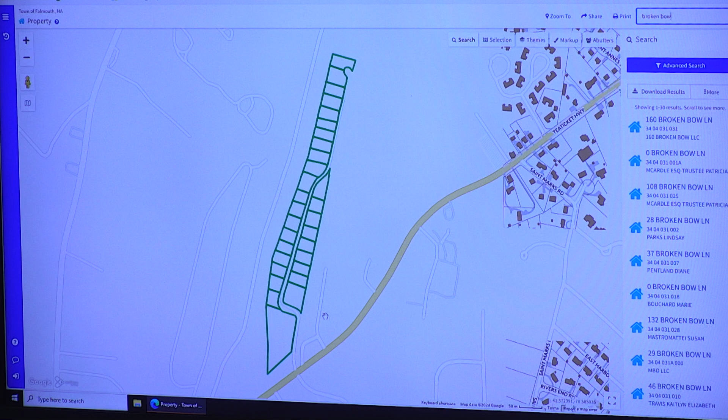So before you tonight is a referral from the ZBA for 0 Broken Bow Lane. It includes 16 units. If you're not familiar, this location is right at the beginning of Broken Bow Lane, which is just east of Homestead Lane, right across from the mirror and glass place. Correct, right, so it's just past Homestead on the left-hand side. So Belinda's calling it up on the GIS. So it's the parcel of land located just before the subdivision, but not directly on Route 28. There's actually a piece of land between Teaticket Highway and this parcel that is owned, I believe, by the state.

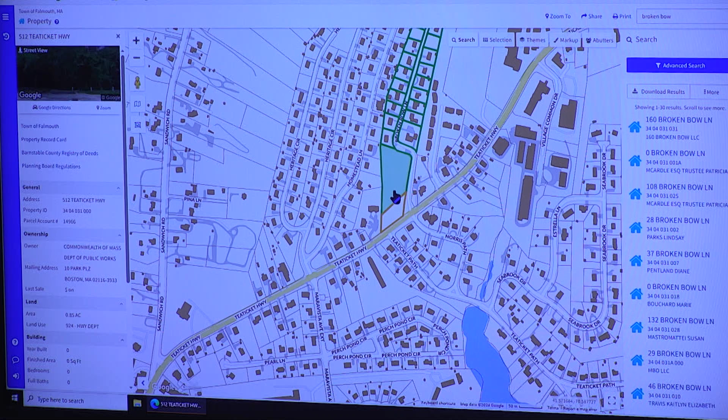So it doesn't abut Route 28 directly. Will there be a green buffer? It's vegetated currently, so the whole area is completely vegetated, so it will remain as such.

Madam Chair, before I start, I have to just announce that the owner of this property is a previous neighbor of mine. I've done business with him, I've done business with his family. I have no financial relationship going on. I feel comfortable that I can act independently on this, but I just wanted to say that. I've been pointed out that I hadn't said that at previous times when people objected to it, but as long as I say it, I'm covering myself, so I just need to point out, no financial relationship whatsoever, and no current contract. But in my business, I can have a contract with anybody at any time if they want to sell their house - that's what I do.

Right, so I'm just letting you know, I have multiple relationships - friendship, neighborhood, and business - in the past with the owner of the property, with, I believe it's William Curley. It is, the current owner of the property, yes.

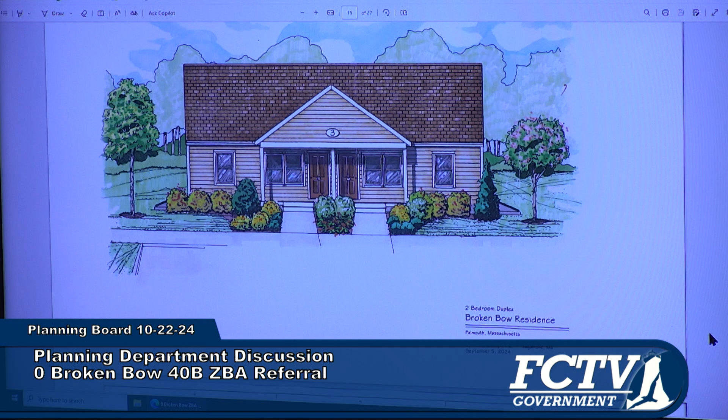A question, Jed - these elevations look remarkably familiar. Have we seen this before, or are they just getting these out of a catalog? These are very similar to the elevations you saw for the 85 Brick Hill Road proposal. Yeah, so it's very similar, it's the same duplex style structure. The studio apartment - if Melinda can just scroll down - the studio apartment building is slightly different, there's some modifications made to that. I think it can keep going.

16 units, two-story, you said? Yes, 16 total. So before you have, right, they're using essentially the same architecture consultant, the very same architecture. 4 units? That's 1, 2, 3, 4, 5, 6, 7, 8 - that is 8 units, 8 units. Yes, count the doors - 2 of those.

There's just one studio building built, so these are all studio apartments, 8 units within that building on the site, and then the remainder of the buildings are proposed to be duplexes. So you'll have 8 studio apartments and 8 two-bedroom apartments, all rental within this development.

Are there 2 buildings like that? Only one, only one.

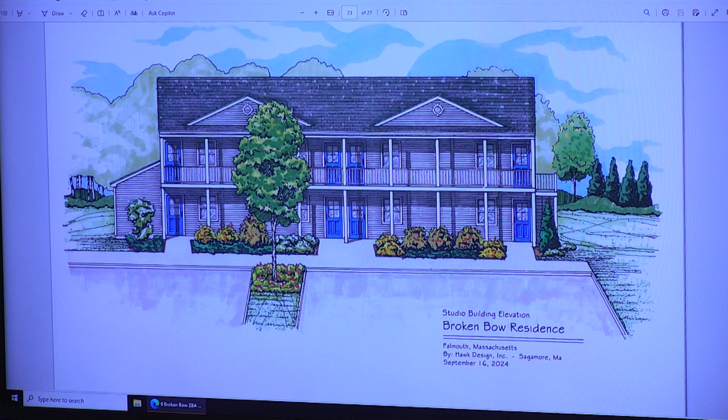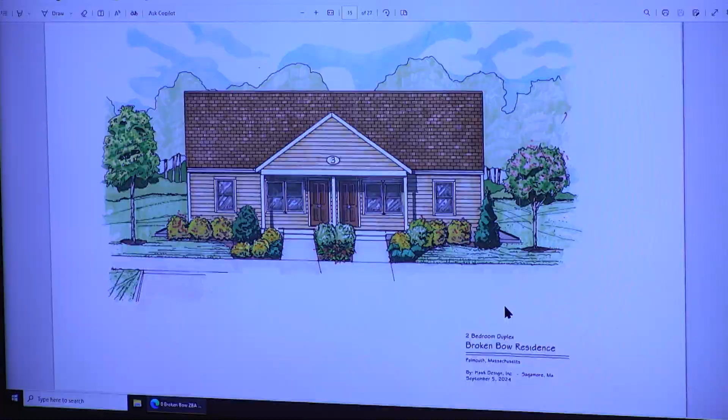You said 8 two-bedroom, but there's a question there because they're showing 3-bedroom also in the elevations. We're not told what any of them are. On the site plan itself, on sheet 3 of 11, they show the proposed duplex as 2-bedroom units. But we will certainly add that into the referral, that there seems to be confusion on the type of unit, because they do show a 3-bedroom elevation in the packet.

I don't know if this is an appropriate question, but I'm wondering if the trade-off on low-grade aesthetics turns out in low prices for the houses, so they might actually approach being affordable. Well, in full disclosure, it is the approach of the applicant to try and keep the costs down of construction. So what's their intent on charging for these?

I'm not sure that they provided that in the referral. But wouldn't that be important information? Well, don't they have to have 25% automatically affordable? They do, 25%. So there's 4 units that will be affordable to households earning no more than 80% of the AMI. So there's only 4 affordable units, the remainder are market rate. But they all look like cheap housing, so I'm wondering what they're planning to charge for them.

I just don't have that information at my fingertips, and it wasn't included in the referral. The referral is really about the site plan itself, the layout, the elevations, et cetera. We can certainly add it. You would think, considering the goal is affordable housing, that somewhere in the application process there would be information about the ultimate price to a consumer. If that's the end goal, what does it look like? What is being proposed? It seems an important part of a proposal. Certainly, we can check the Zoning Board of Appeals webpage, because they do include all of the application materials, so we can try to do that very quickly.

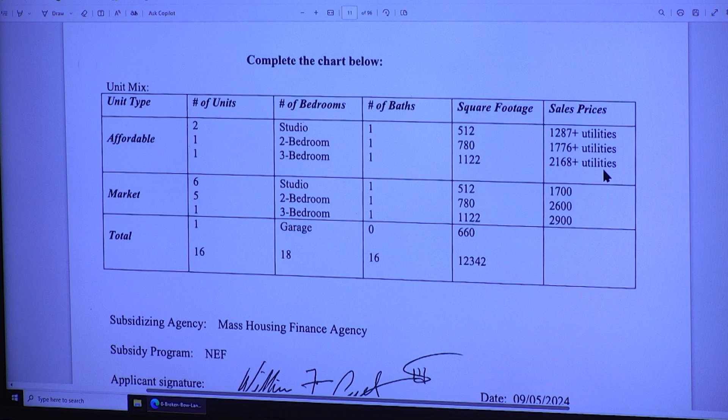The town doesn't set the rate, Barnstable County does, isn't that something you have a hand in? I just think it's part of the process, but something ought to generate attention on the failure to meet the overall goal. It's a farce, yeah it is, and we're participants. We give a blessing to it, but it's a farce.

So anyway, what do we want to do with this? We get to comment on it. So does anyone wish to comment?

Well, first of all, there is no landscaping plan in here, and that's one of our things we're looking at on site plan review, that's our responsibility. There are nice pictures, but there's no landscaping plan. There's one garage shown that is for storage, but you have the efficiency apartments, and this is not in our purview, where are they gonna store anything? That's why I think they get these from a catalog, because we had the same comments on the one that looked like this.

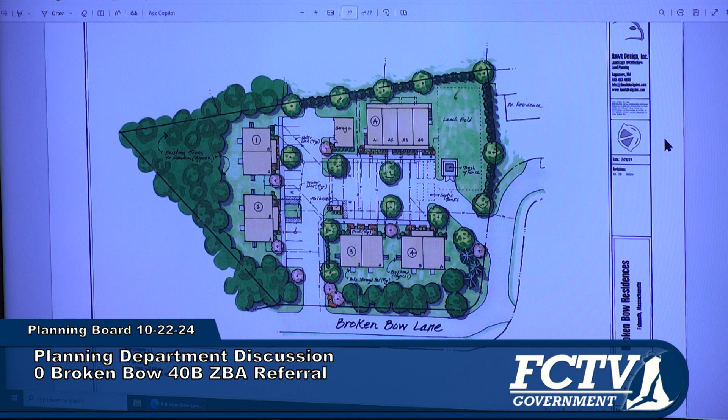Is that a landscaping plan we're looking at? This is a conceptual site design. Okay, so I didn't see it in what we have. They didn't give it to us. This is on the ZBA's website. Oh okay. And again, it's just conceptual.

I think our comment should say that the buildings look very stripped down. It makes it look, I don't know, I think we should be careful in the wording, and you're good at that, Jed, to make it not pejorative, but find a way to say really ugly. I will find a way. Thank you. For us to really look at a landscaping plan, we usually have more detail there, what's gonna be put where, instead of just kind of an idea.

Any other comments? And who's gonna be the agent to monitor the rentals, is it the builder? Oh no, I think they have to use the town, Kim Fish I would suppose. So there'll be a local monitoring agent for the affordable units, which will have to go through a lottery process. Usually it's Housing Assistance Corporation that runs it, HAC, they run the lotteries and they qualify and monitor.

I know nothing about this project, but I'm talking about experience with Kendall Lane, all of it, yeah. Which is all sold, right? Oh yeah, and I encourage you all to look at it, because I flew my drone out today, and you wouldn't believe how beautiful the lawns are, the landscaping's there. I really think you should all drive through the street now, it's connected on Alma Lane, you really gotta judge it and look. I gotta go take a look. We took a lot of heat, and I think it's absolutely beautiful, it's amazing.